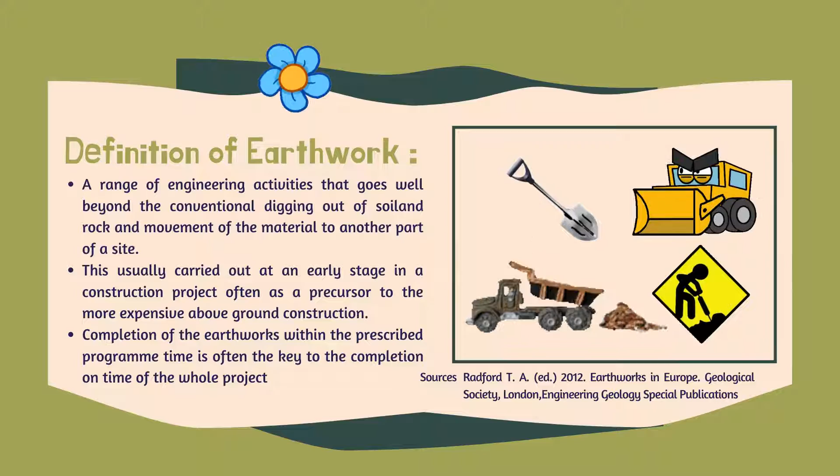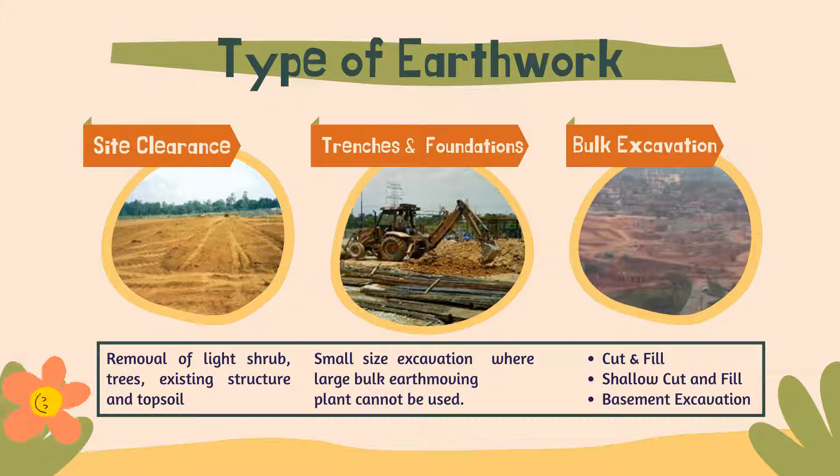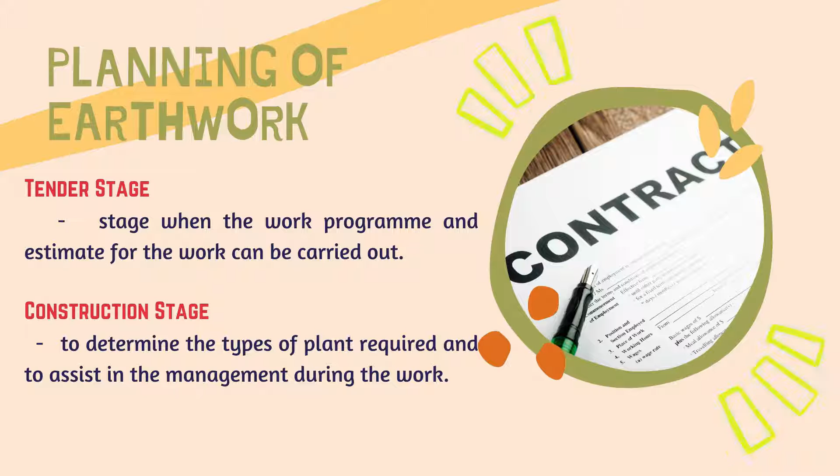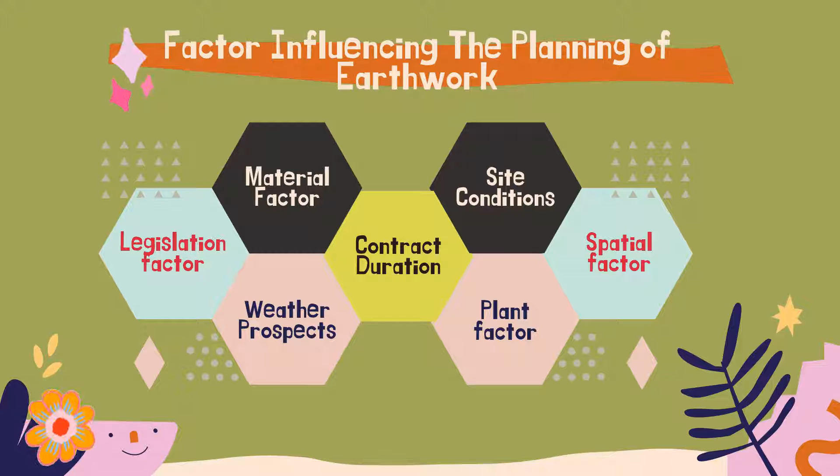There are a few classifications of earthwork machinery, which are excavation, excavation and load, haul and deposit, excavation load haul and deposit, and compaction. The function of these machines varies depending on the needs and situation.

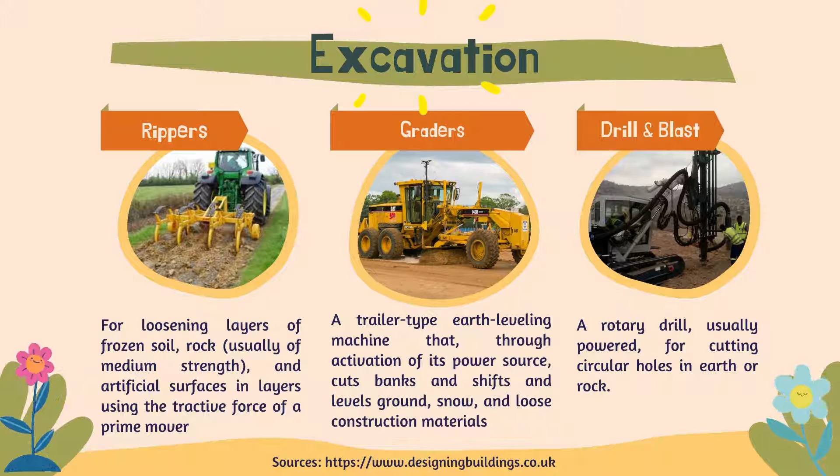Second, graders, a trailer-type earth leveling machine that, through activation of its power source, cuts banks and shifts and levels ground, snow and loose construction materials. Third, drill and blast, a rotary drill usually powered for cutting circular holes in earth or rock.

Another excavation machinery is the hydraulic breaker, a powerful percussion hammer fit to an excavator for demolishing concrete structures or rocks, powered by an auxiliary hydraulic system from the excavator. And then the bulldozer, a self-propelled earth-moving machine consisting of a caterpillar or wheel tractor or similar machine with an attached operating member, a curved blade, located outside the base of the machine's undercarriage.

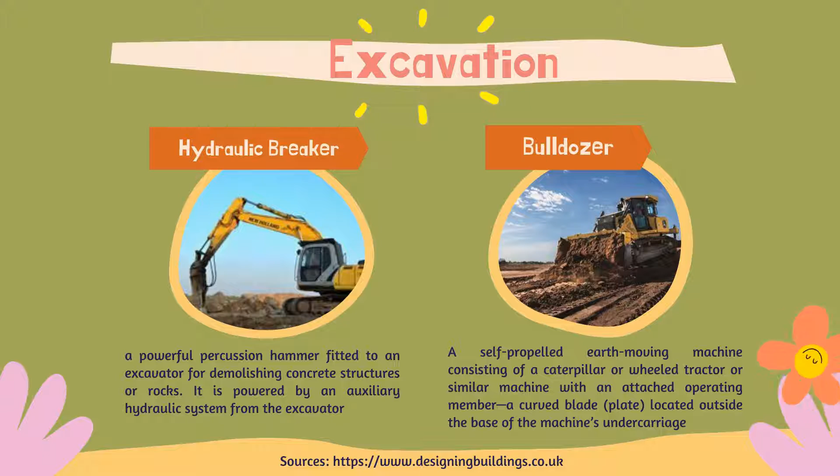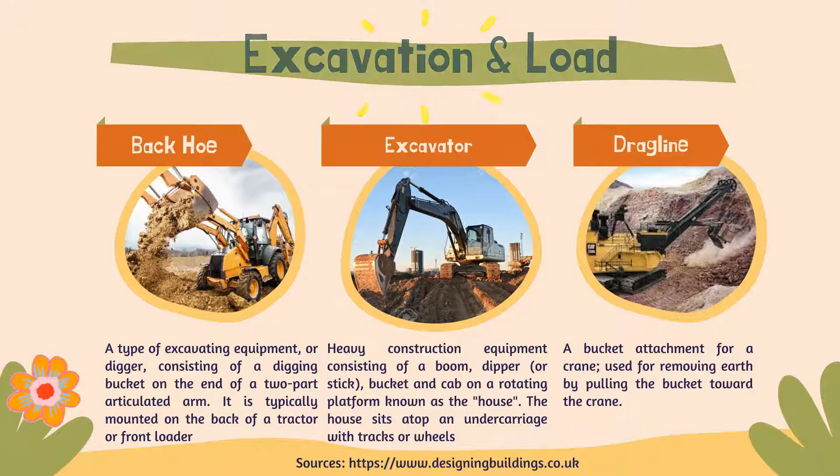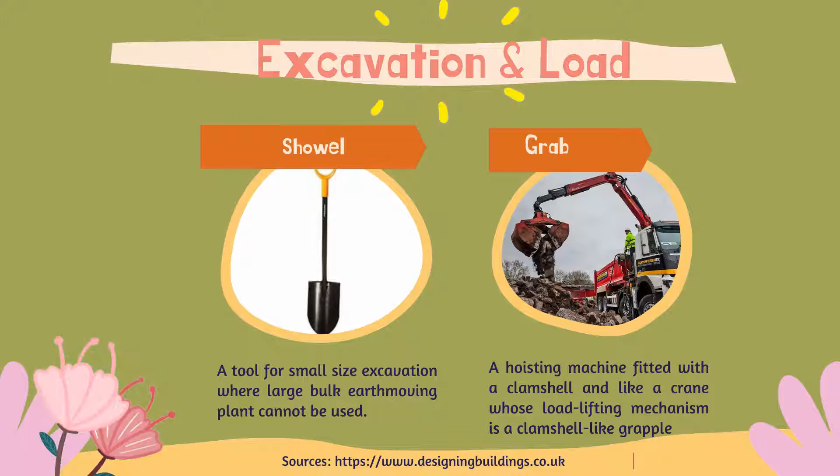For shovel, a tool for small size excavation where large bulk earth-moving plant cannot be used. And for grab, a hoisting machine fit with a clamshell, like a crane whose load lifting mechanism is a clamshell-like grapple. Haul and deposit is the machinery used to move materials from one place to another, often seen on the road.

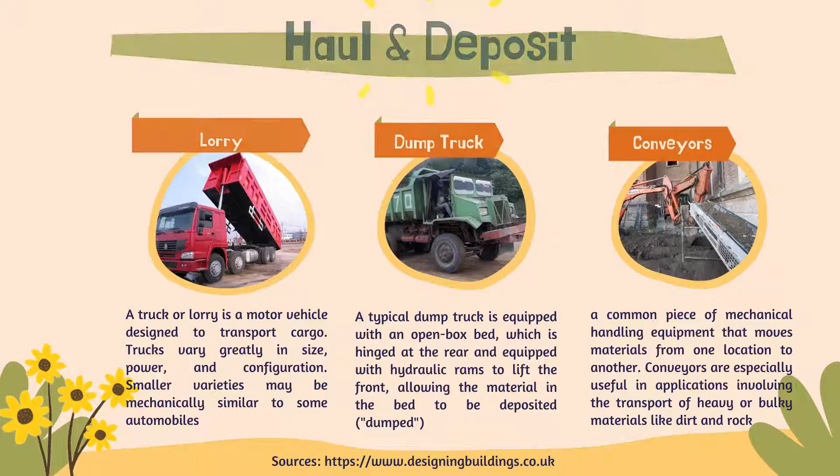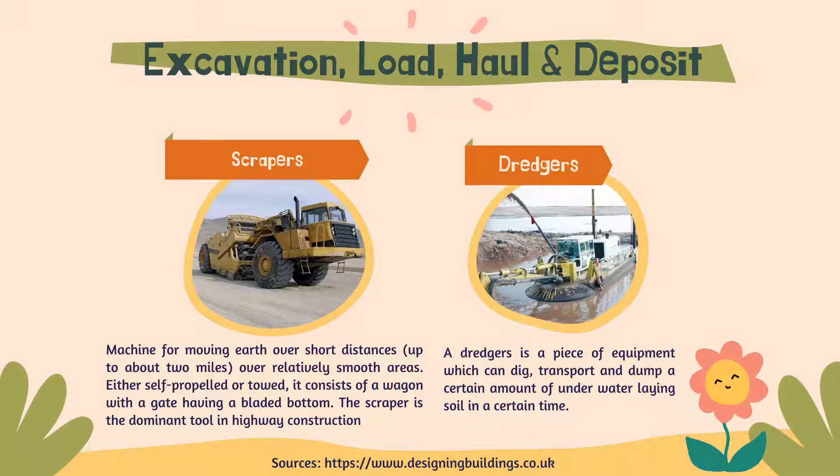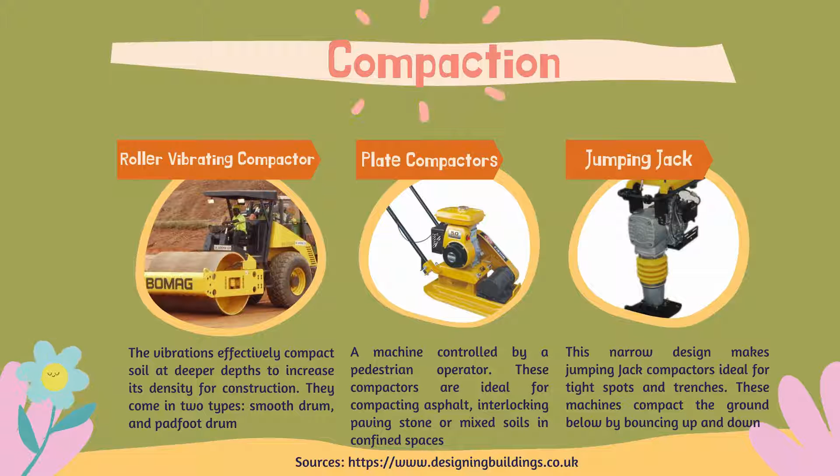For plate compactors, a machine controlled by a pedestrian operator, ideal for compacting asphalt, interlocking paving stone or mixed soil in confined space. And for jumping jack, this narrow design makes jumping jack compactors ideal for tight spots and trenches. This machine compacts the ground below by bouncing up and down.

To select plant and machinery, some factors need to be looked at, such as the function to be carried out, soil surface condition, depth and width of excavation, hauling distance, gradient of slope, space of site and width of track, volume of work, capacity of the machine, adaptability of plant, and balance of capacity.

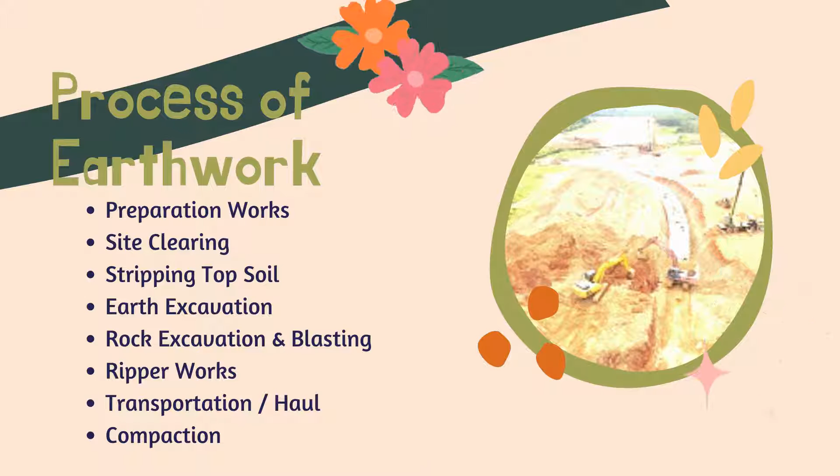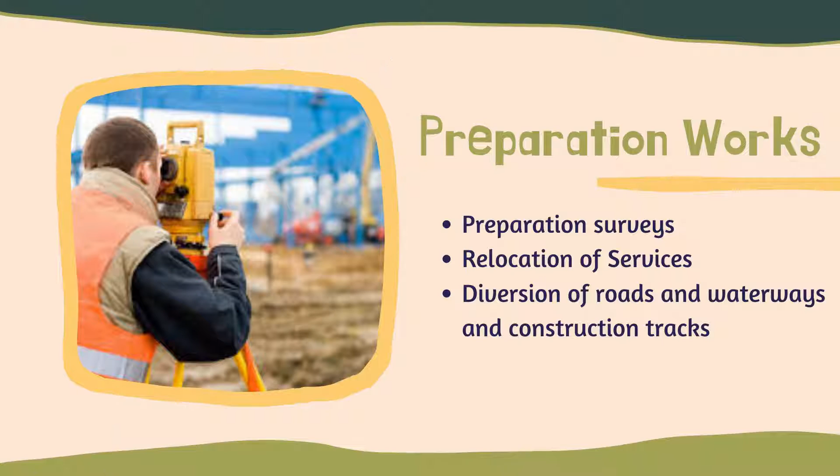The process of earthwork includes preparation works, site clearing, stripping topsoil, earth excavation, rock excavation and blasting, ripper works, transportation and hauls, and compaction. For preparation works, this includes preparation surveys, relocation of services, diversion of roads and waterways, and construction tracks.

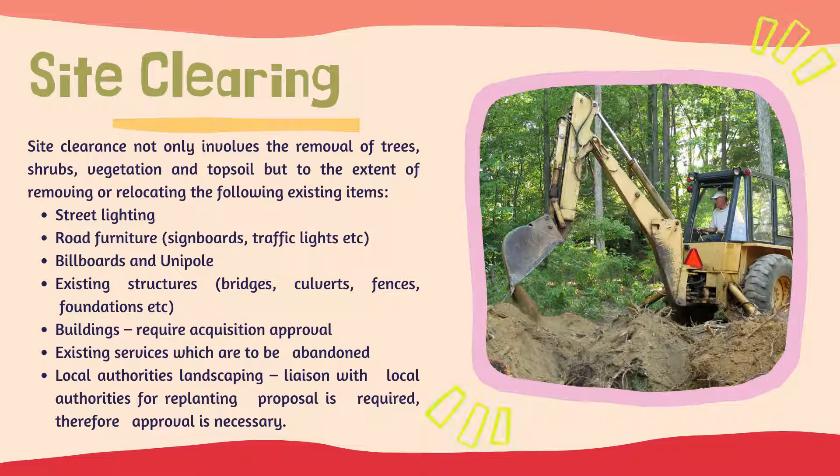Site clearing. Site clearance not only involves the removal of trees, shrubs, vegetation and topsoil, but extends to removing or relocating things such as street lighting, road furniture, billboards and unipoles, and existing structures such as bridges, culverts, fences and foundations.

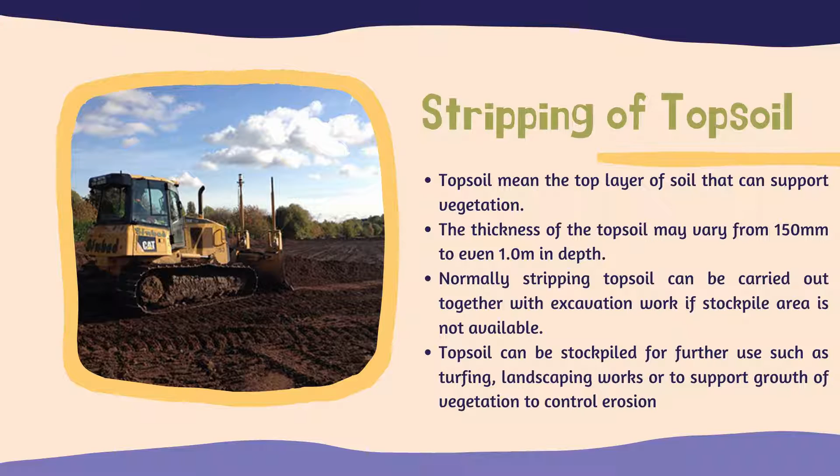Stripping of topsoil. Topsoil means the top layer of soil that can support vegetation. The thickness may vary from 150 mm to even 1.0 m in depth. Normally, stripping topsoil can be carried out together with excavation work. Topsoil can be stockpiled for further use such as turfing, landscaping work or to support growth of vegetation to control erosion.

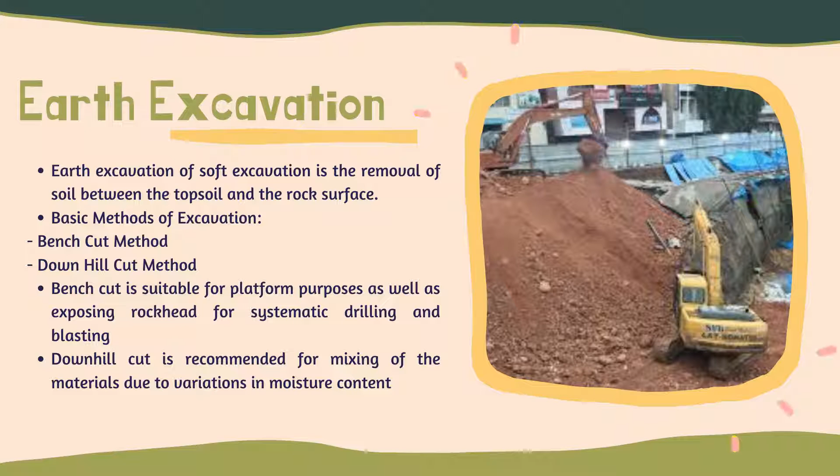Earth excavation. Earth excavation is the removal of soil between the topsoil and the rock surface. Basic methods of excavation are the bench cut method and downhill cut method. The bench cut is suitable for platforms, such as exposing rock head for systematic drilling and blasting. The downhill cut allows mixing of the material due to variations in moisture content.

Rock excavation and blasting. Rock excavation or hard excavation is the removal of a formation that cannot be excavated on a large scale without systematic drilling and blasting. Methods of blasting include the bench cut method, small scale blasting, pre-split blasting, boulder blasting and secondary blasting.

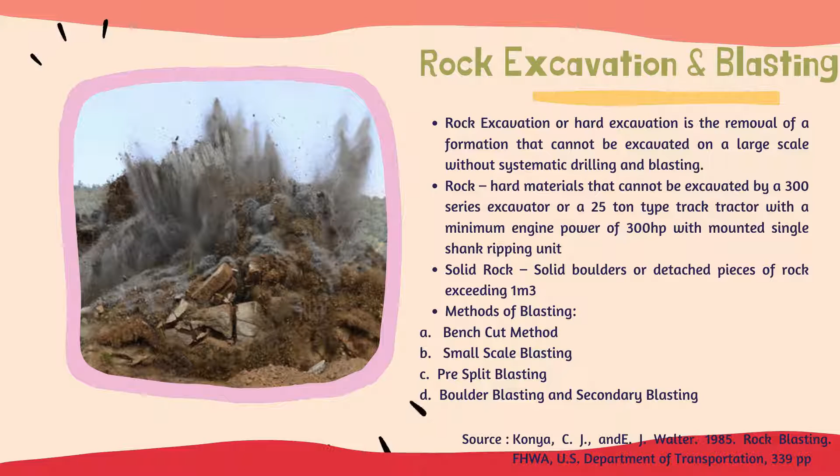Ripping work. The term ripping refers to the loosening of soil, rock or frozen ground by drawing a fork or prong implement through it. Ripping can be carried out by tractor with rear-mounted rippers. There are two best practices: deep ripping and decompaction. Deep ripping and decompaction are key factors which help in restoring soil pore space and permeability for water infiltration.

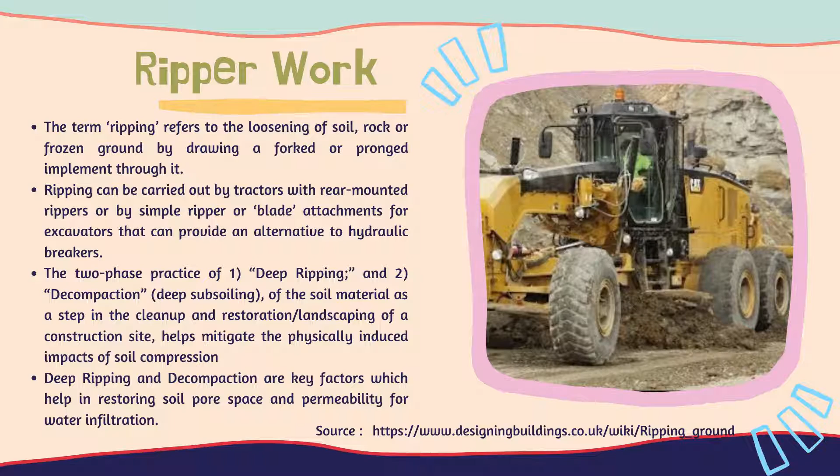Transportation and hauling. To transport the dirt and rock, we need machinery like a lorry or a dumper. This machinery can transport and haul a tonnage of payload over flexible distances. Machinery like a dump lorry can tilt their wagon to dump their payload easily into the desired place.

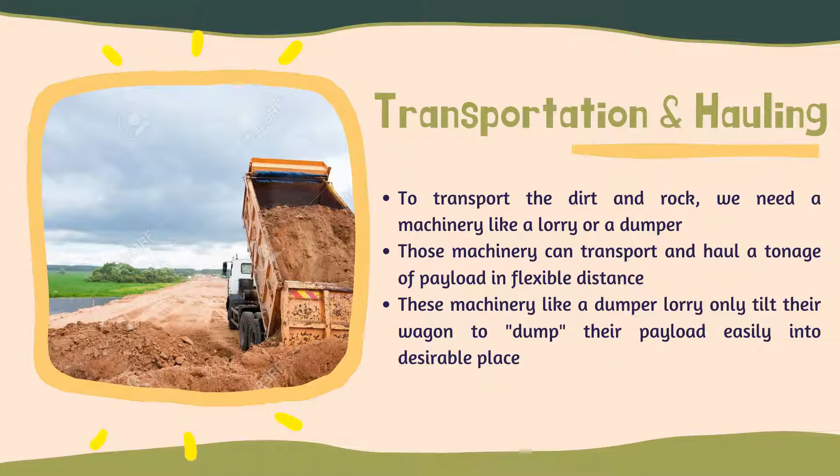Compaction. Compaction is a process of increasing soil density and removing air, usually by mechanical means. The size of the individual soil particles does not change, neither is water removed. Functions of compaction are also to increase shear strength and therefore bearing capacity, and increase stiffness and therefore reduce future settlement.

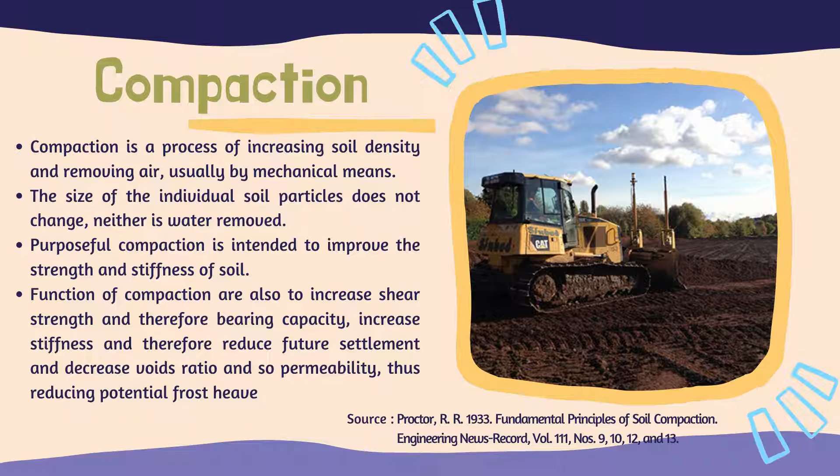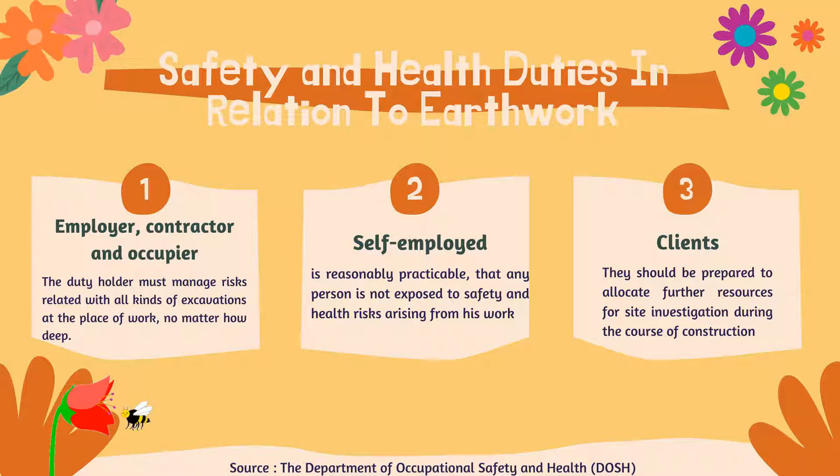Safety and health duties in relation to earthwork. First is the employer, contractor and occupier. The duty holder must manage risks related with all kinds of excavations at the place of work, no matter how deep. Secondly is self-employed. The self-employed must ensure, as far as reasonably practicable, that any person is not exposed to safety and health risks arising from his work. Thirdly is the clients. They should be prepared to allocate further resources for site investigation during the course of construction.

Fourth is the contractor. The contractor has legal obligations under Part XII of the Factories and Machinery (Building Operations and Works of Engineering Construction) (Safety) Regulations, BOWECS. Fifth is professional engineers. They must submit to the person who commissioned the design a written safety report that specifies the excavation work methods, hazards regarding the design of the supporting structure and control measures.

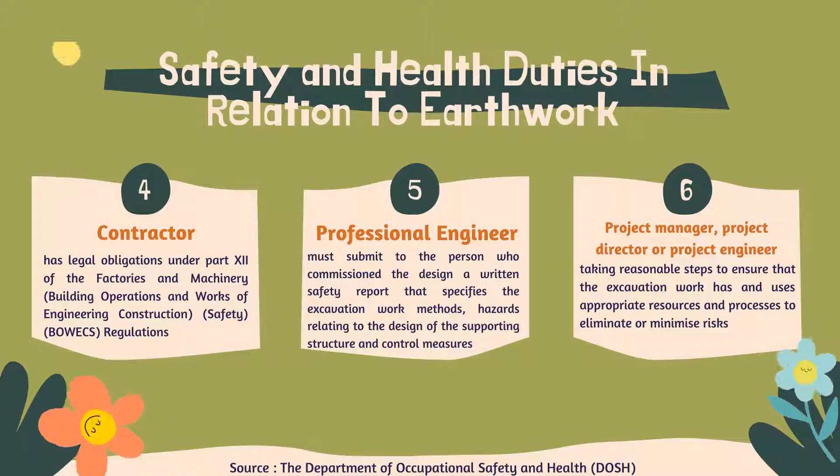Sixth is the project manager, project director or project engineer. They take reasonable steps to ensure that the excavation work has and uses appropriate resources and processes to eliminate or minimize risk. Seventh is the safety and health officer. They ensure due observance during the excavation work of the provisions of OSHA and regulations, as well as the promotion of safe conduct of excavation works.

Eighth is the site safety supervisor. They ensure that the provisions of the FMA and regulations are complied with and promote the safe conduct of excavation work within the work site. Ninth is the workers. They must comply with any reasonable instructions and cooperate with any reasonable policy or procedure relating to safety and health at the place of work.

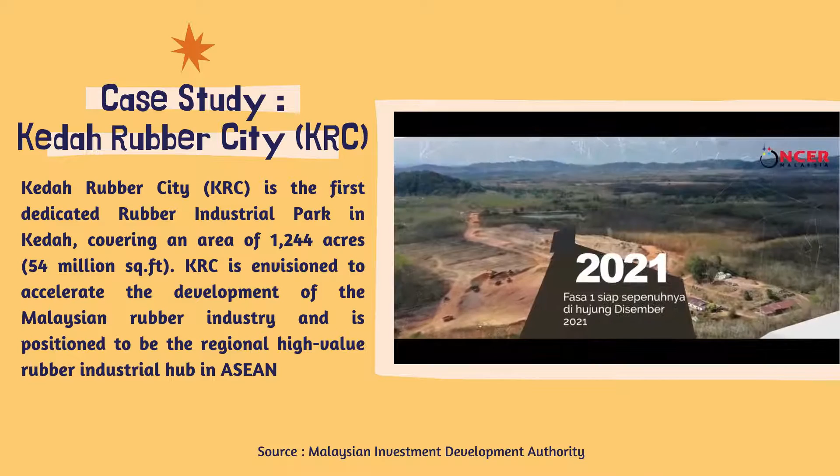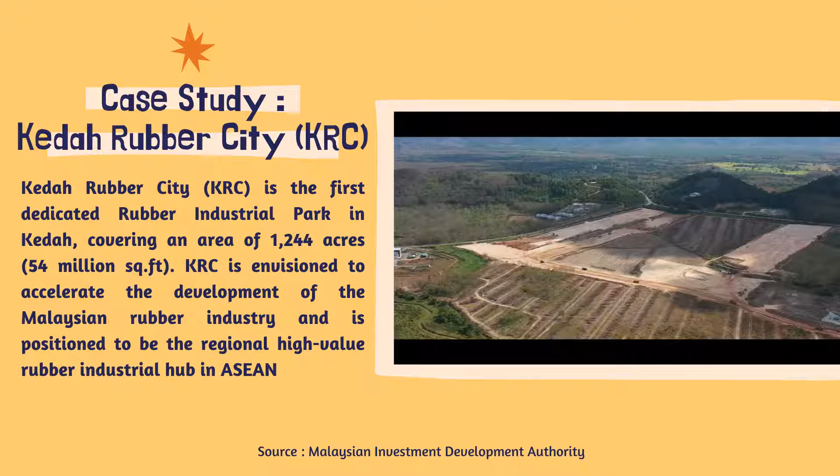For our case study, we have chosen Kedah Rubber City, KRC, which is the first dedicated rubber industrial park in Kedah, covering an area of 1,244 acres, equal to 54 million square feet. KRC is envisioned to accelerate the development of the Malaysian rubber industry and is positioned to be a regional high-value rubber industrial hub in ASEAN.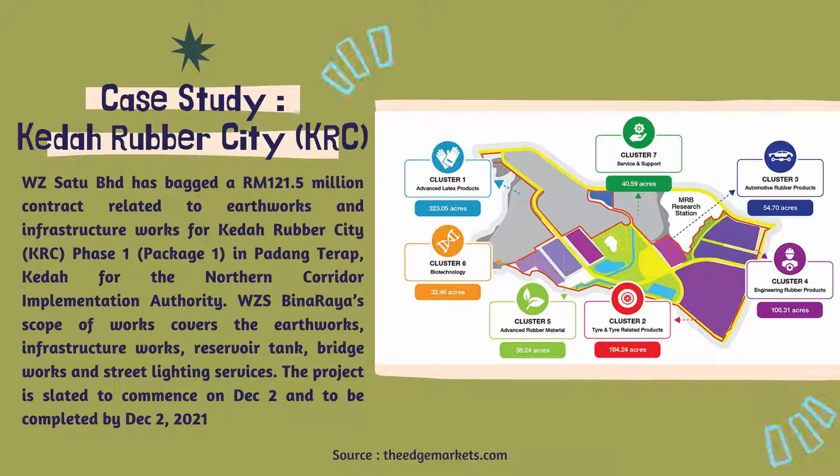Furthermore, a RM121.5 million contract has been bagged by WZ Satu Berhad related to earthworks and infrastructure works for KRC in Padang Terap, Kedah for the Northern Corridor Implementation Authority. The scope of work covered by WZS Binaraya is earthworks, infrastructure works, reservoir tank, bridge works and street lighting services. The project is slated to commence on December 2 and to be completed by December 2, 2021.